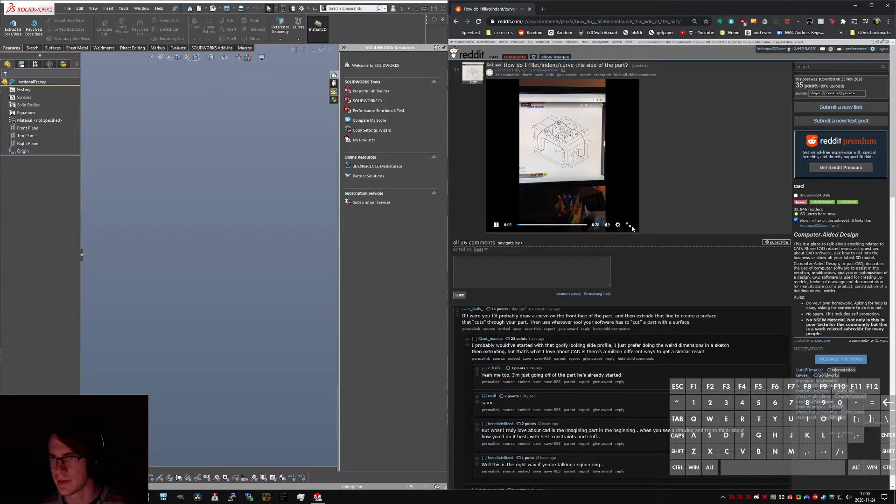Okay, so for the benefit of the people watching, this is the part we're dealing with. We got kind of a funny lump thing. I'll pause it for a sec. This guy's issue is that he can't figure out how fillets work. So he then goes over to show this guy, which is where he's gotten to, which is pretty good. I mean, it's got sort of the bulk of the geometry there, but he's missing those two fillets.

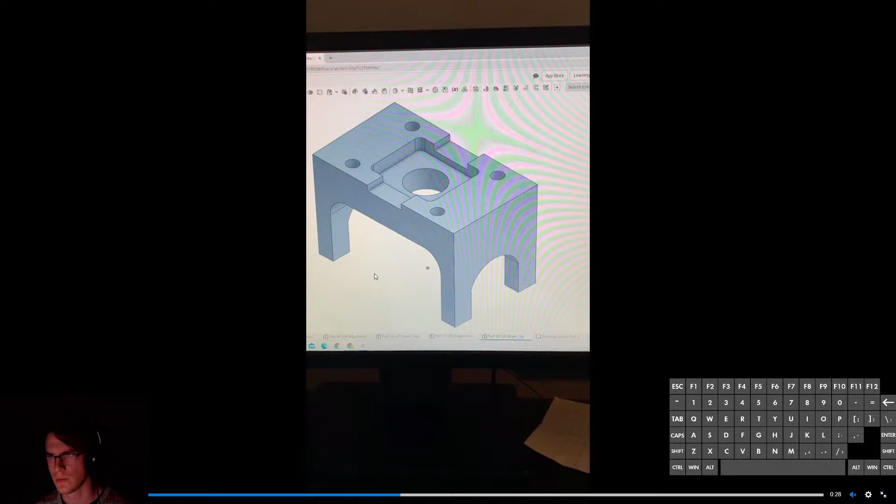So I'm going to model it the way that he did first, and then I'm going to tackle it. Well, I'll model it the way he did, and then I think I can go back and tweak the part and show how to make that without the problem that he's run into, because I think this is a pretty easy thing to fix. So I'm just gonna go hide that. I'm gonna bring up a print on a different screen, and we're gonna hop to it.

So first up, I'm gonna do... Actually, do I want to throw the print up? Yeah, let me throw the print up. Browser, source visible, local file. Hey, check it out. Good streamer, man. Cool, okay, so you can see what I can see, and I can see what I need to see.

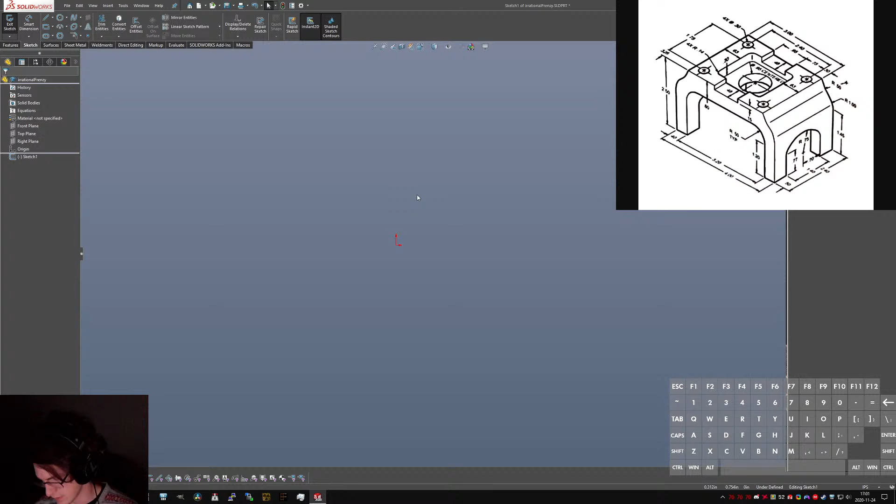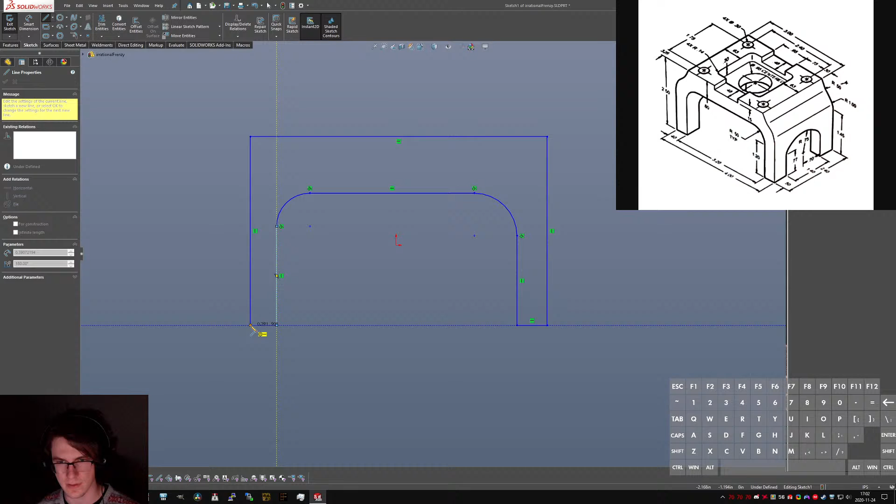So let's start with, well, I'll just leave it on the drawing. So I'm gonna draw it the way that he drew it, which is this sort of roundabout. Oh my god, more fillets. Yeah, I'm adding the fillets. Doing them in the sketch this time though, because I'm a cool kid. Not that you should add fillets in the sketches every time. There are sometimes those sketches that depend on other things where you need to avoid doing it in the sketch.

So I think this one is 0.4. This is 4 inches, and that got it all jacked up. And equal and collinear to make a nice floor. Those are equal. Keep it 0.5. And this, for some reason, is dimensioned from right here. I don't know who would ever dimension this way, but it's bad and dumb, and you shouldn't do that. Agree to disagree, more fillets. Look, I'll put more fillets on it at the end.

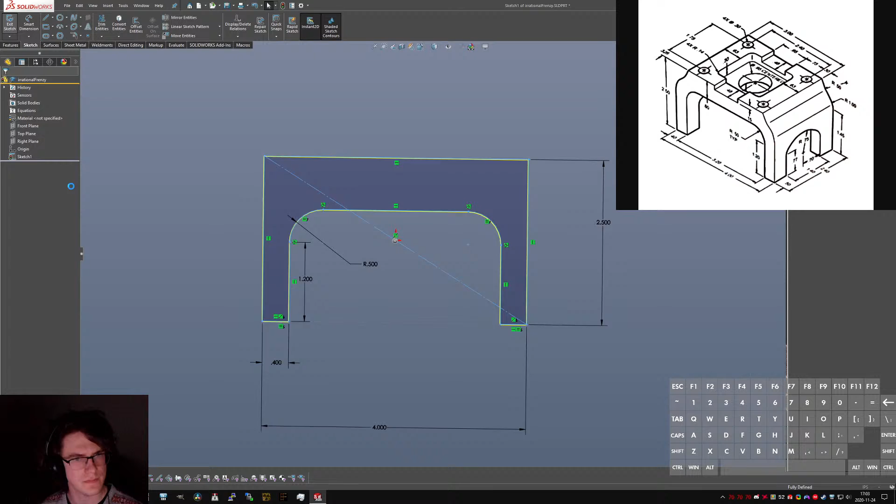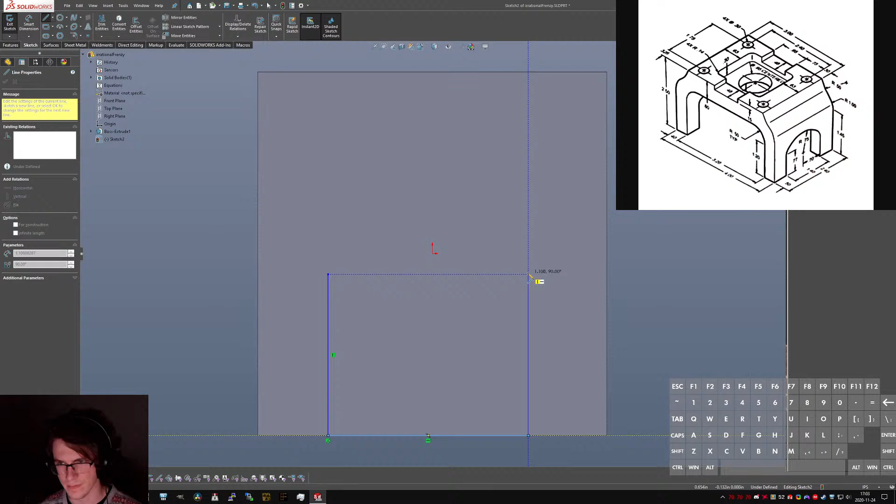2.5 inches tall. That's that set of features. Do a midplane because I'm a cool kid. That looks like 2.4 inches. It's not really perfect, but it's close enough. Oh, this will be a little annoying. So whoever drew this decided that this needed to be kind of its own weird thing. And it's just doing it. It's just really going for it.

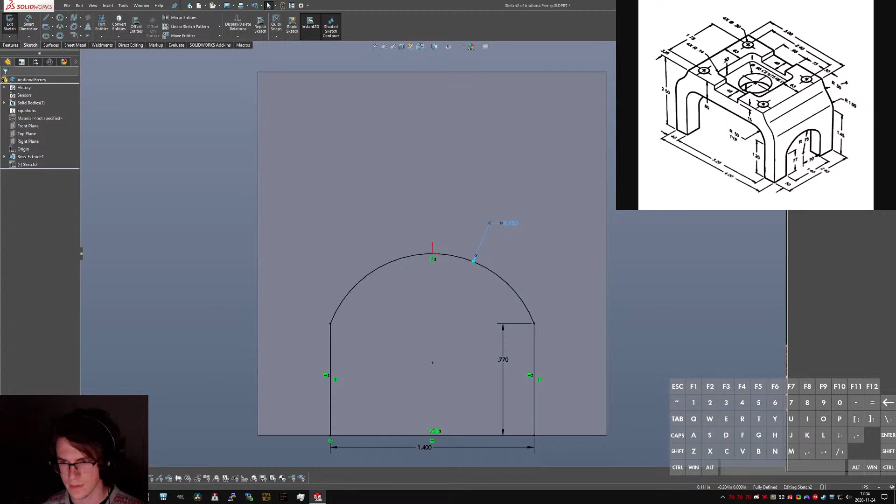This is 1.4. And I'm going to be a git. I want to select the midpoint and make it vertical, so it's easier that way. And those aren't equal, but they are now. Nice. So this will just be an extruded cut through all to make those sort of arches on the sides. Then we're going to come up here and probably go with this big guy here in the center first.

Oh god, I can't tell how wide that is. I photoshopped this. I tried to. This is 2020-2021, I think, the educational version. Actually, hang on. No, I can just boink. Yep, 2020-2021. Via the ever gracious... Oh my god, I cannot figure out what number that is.

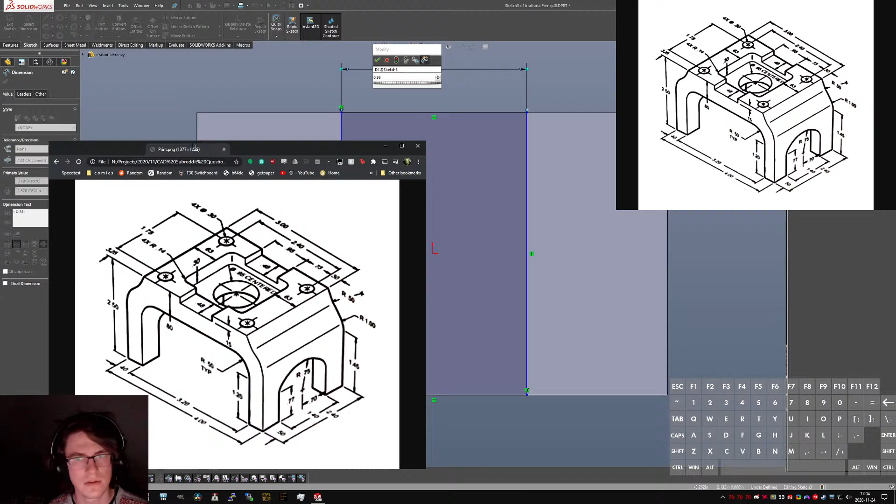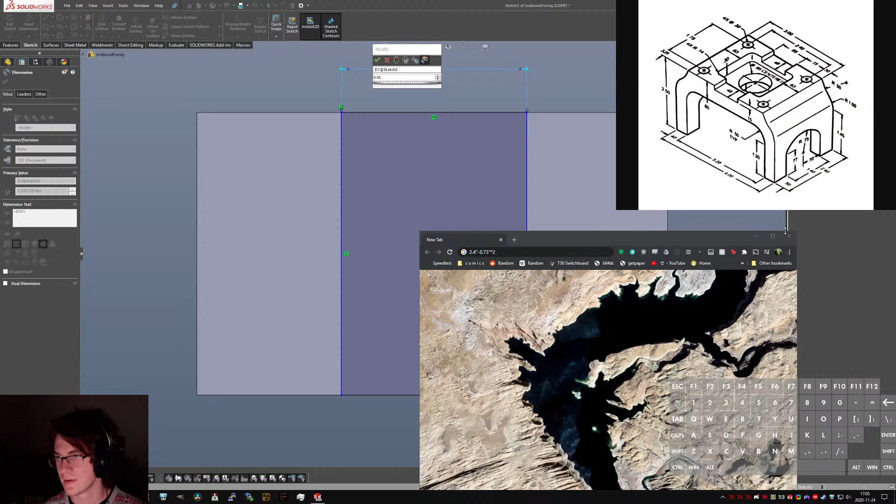Okay, so to give you some context: drawing, math. This number right here looks like 2.4 inches minus what looks like 0.73 inches times 2 is 0.94, 0.95. I'm just going to go with 0.95. Whoops, I need that tab back because that's the one I'm using. Oh, yeah, I also have dark mode on because all the cool kids use dark mode.

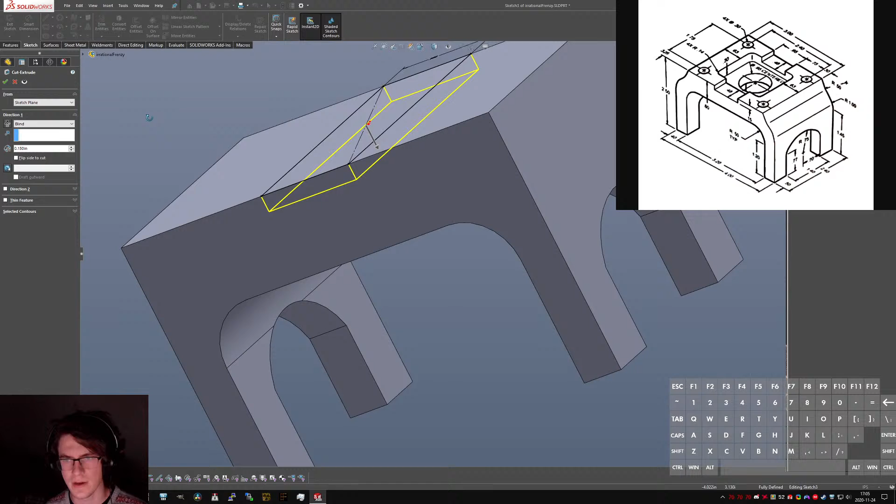And point. Okay. The depth there is 0.15. And we're going to do another extruded cut. Actually, I want to do the extruded cut for the middle bit before the other bit because, I don't know, I had a reason for it when I started that sentence, and then I didn't by the end.

Boink, boink, boink, boink. Whoops, shit, I hit escape instead of enter. The other thing you can do is right click, that's why you get that little green check mark there if you don't move your mouse too much. And those radii are 0.14. And then we've got some dimensions.

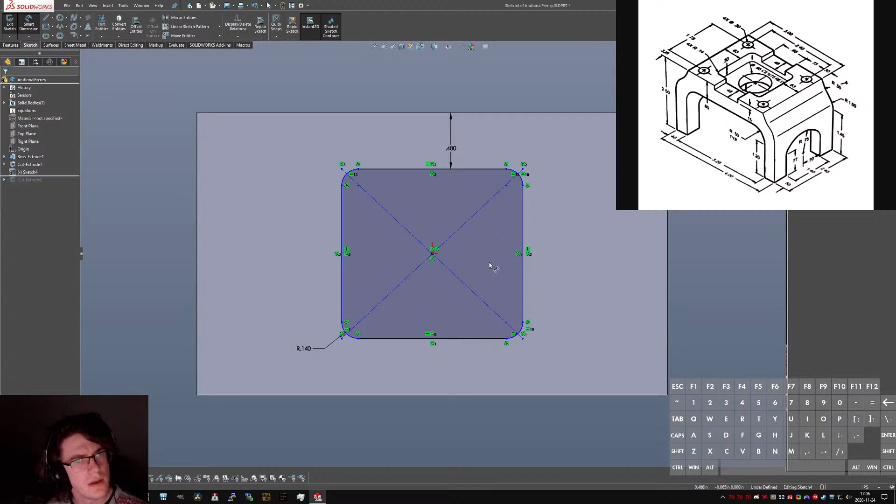Bollocks, they don't describe how high that is. Oh, no, wait, they do. Yeah, okay. So, for whatever fucking reason, they've decided to dimension this as distance here at 0.48. And that'll be, because it's still merged there, it's still controlled. And then they've got, oh, that's right, here's the screwy part.

So, the way this guy modeled this, doing this feature before he did the cutouts over here, these kind of swoopy cutouts, it's impossible to define this identically with the drawing, so instead I'm going to have to go, okay, this is 3 inches, these are 0.63 inches. It's probably 0.625 because rounding 1/8 of inches, and because for some reason this is all in only 2 significant figures, but 3 inches minus 0.625 inches times 2, 1.75 inches.

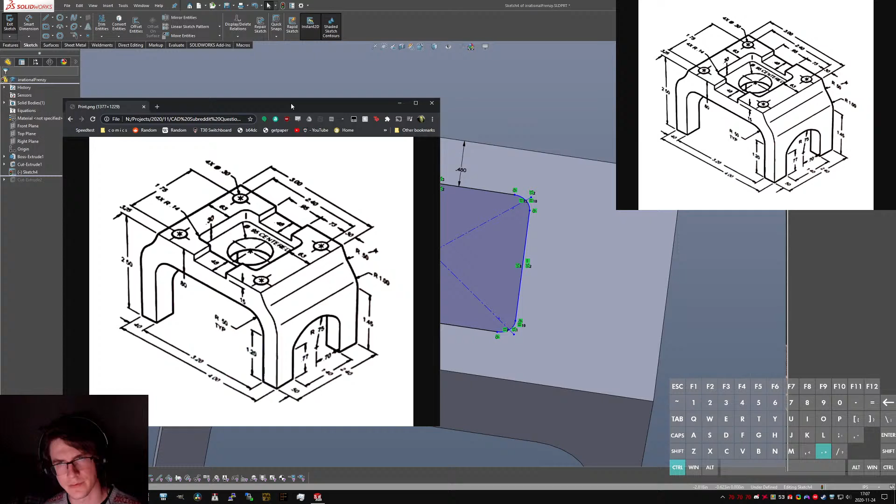That seems pretty reasonable. There's not another dimension on there, so it's not over-constrained, but I'm just going to go with, whoops, keep disappearing my drawings. I'm just going to go with like 1.75. That's nice and reasonable. And then, also according to the drawing, this is 0.3 inches down. And then we have both of those features.

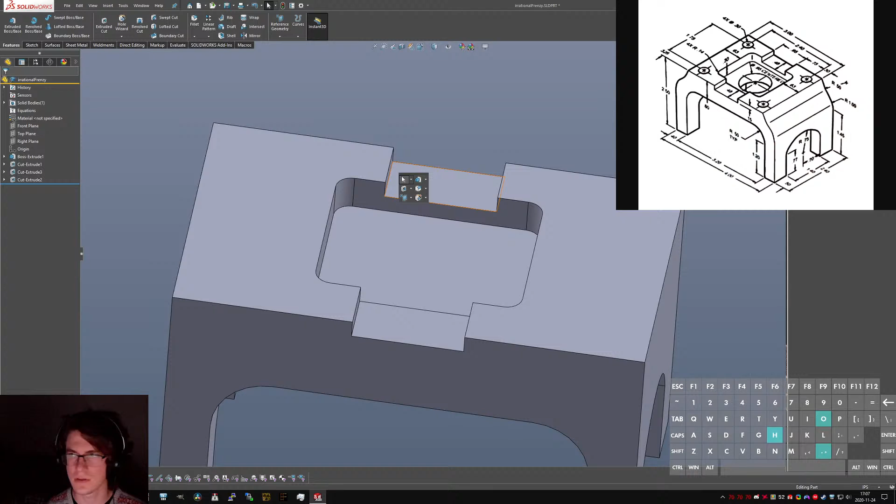Do a quick hole wizard. Yep, God, I need to fix that. It's so annoying. This is not metric. These are 0.3 inches roughly. I don't know. I'm just gonna reset the sizing values. That's ANSI inch. Drill sizes. Oh, come on.

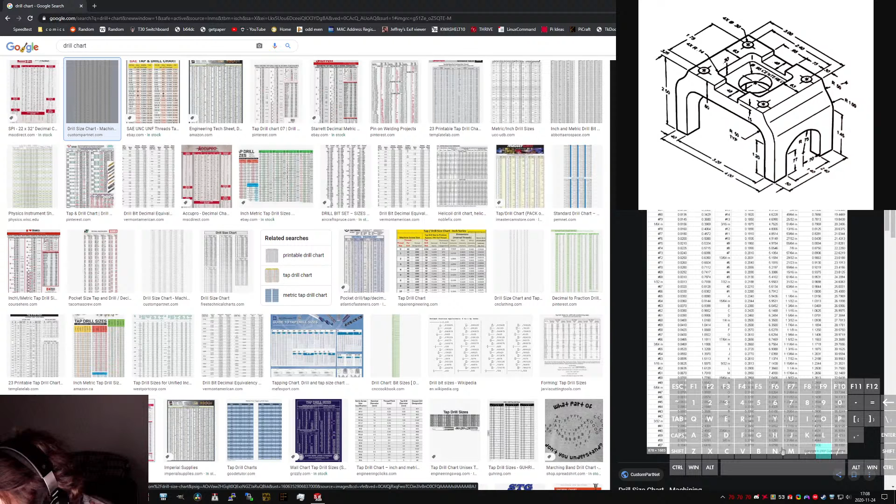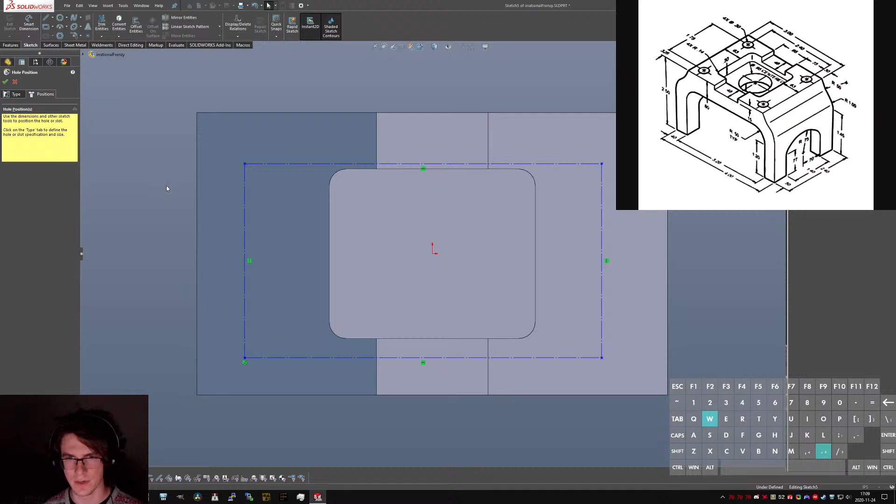And a quick rectangle to give me all my points. Poink, poink, poink, poink. Whoops, that one's not on the corner. There we go. No. Fuck, come on. There we go. Okay. I'm going to make that construction. That's really more of a personal choice thing. I like to have all of my geometry that's not making structures be, I'd like it to be words, but it can't be words because I can't remember what words are.

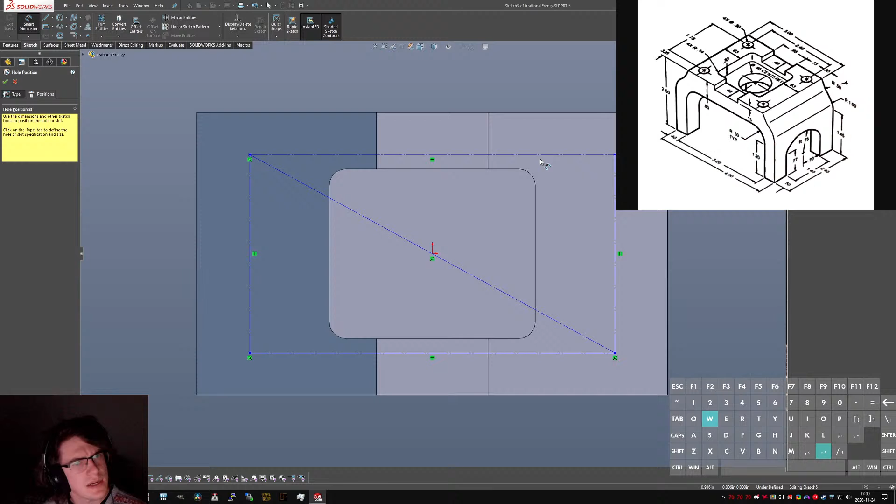Okay, so it's 3 inches on the outside and 0.3 inwards, so this is going to be, oh, 2.4. That already says. I just can't read. Then it's 1.75. And I don't remember if I set those to be up to next. It's not really necessary. Yeah, but up to next is a lot safer.

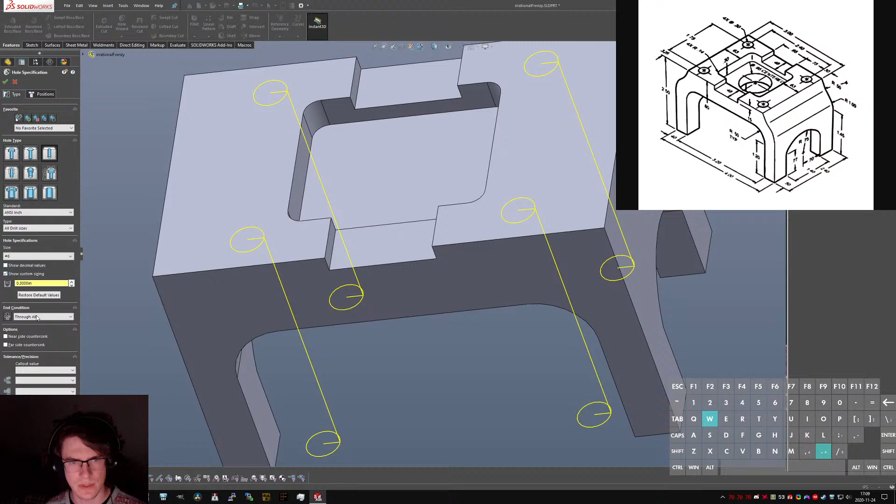Okay, so what our hero did is... Oh, wait, I'm still missing a hole. I'm just going to do it with an extruded cut, because I'm lazy. Boop. Faster for this sort of thing, too. 0.95? I can't really tell. Looks about right scale-wise in the drawing, so it's going to be 0.95.

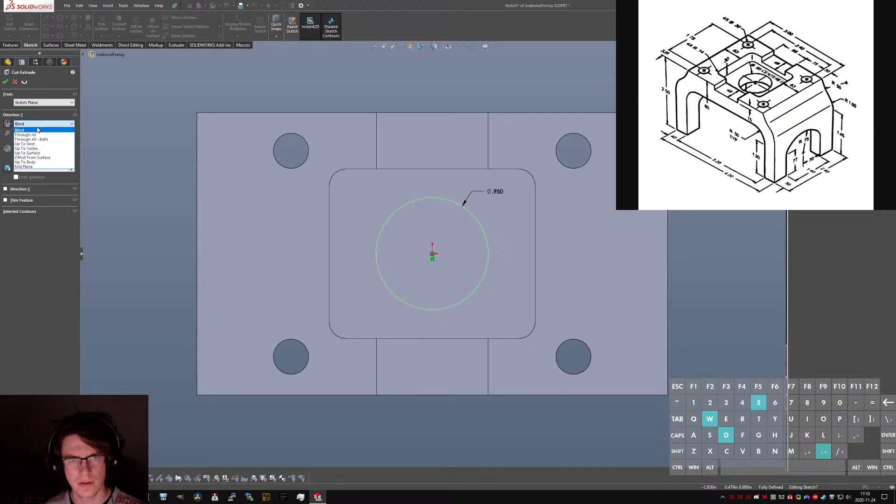Up to next. I'm more okay with using big extrude cuts rather than hole wizards for big single holes like this, because it's the sort of thing where you want it to be just exactly this size, and you don't want to use custom sizing in the hole feature. I mean, sometimes it matters if you want to have your hole callouts be exactly right, or if your company has drafting standards for those hole callouts, but generally speaking, I'm kind of okay with doing this sort of single op extrude cut.

For a little while, when my hole wizard wasn't working, I got used to sketching out points of patterns and then making a plane with a line and a point in that pattern and using that to make a revolve and a cut to shape the bottom of my holes. That is garbage. You should never do that. But it was the only way I could make properly shaped holes, which was really dicey. Fun side effects of having multiple SolidWorks installs.

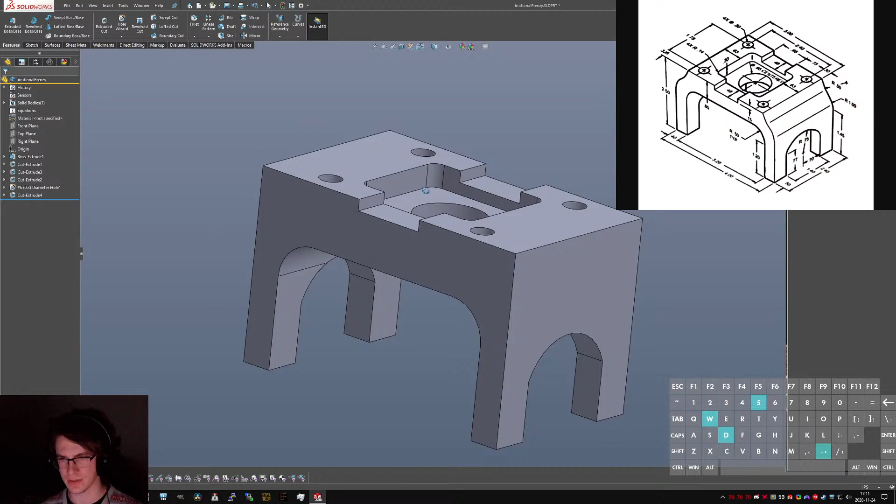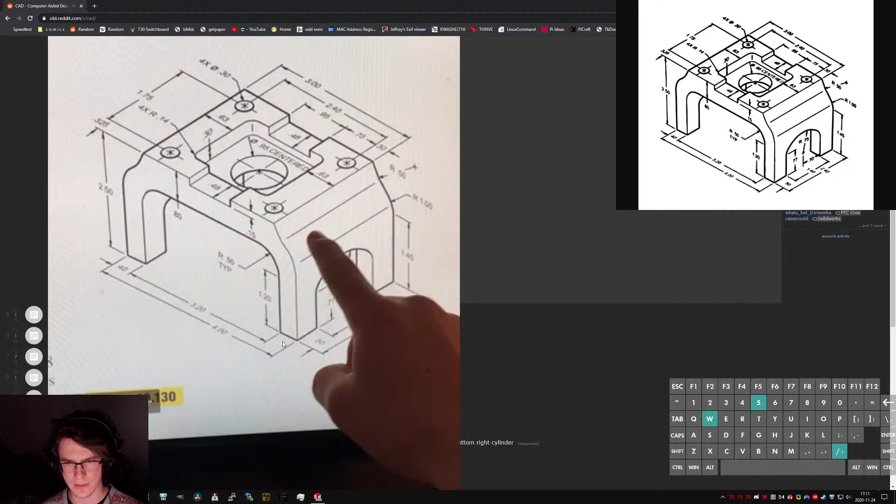Okay, so this is how far our hero got in the original video, which I'm going to go pull up here. r/CAD. Boink. Okay, so this guy, he got this far. He got all... Actually, hang on. Skip ahead a little. Okay. What? No? You can give me back my part. Here we go. Okay, so we got hole holes.

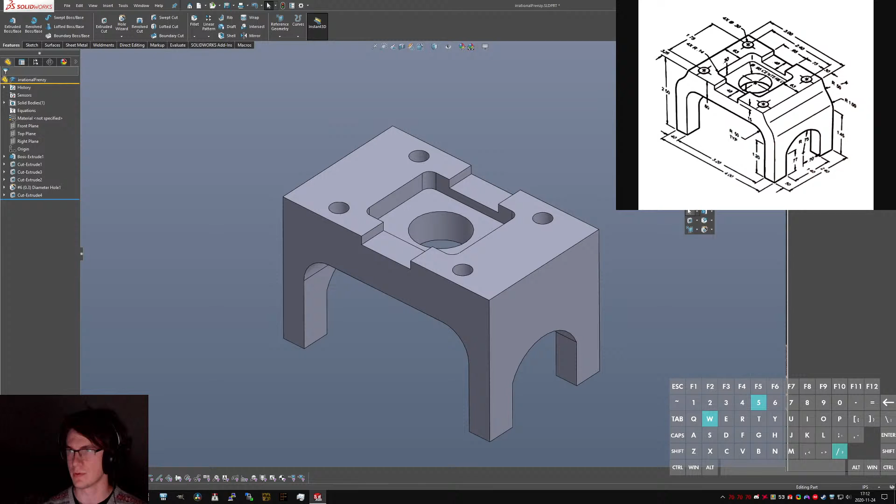Yeah, that looks pretty close. Yeah, close enough. So the way I would go about doing this now is I would probably start with an extruded cut. Like if I, for some reason, ended up at this model, if I didn't want to change anything else, or if I had other features that would be breaking, front plane, just because it's good to do sketches from there.

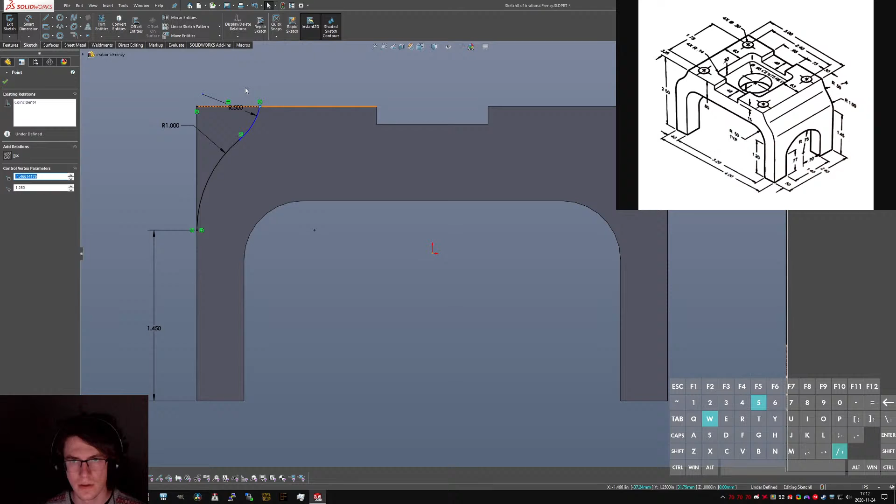We're going to come down, and we're going to make our two arcs. I'm assuming they're tangent because they're not marked as otherwise, but if that's not something that's safe to assume, don't assume that for sure. But 0.5, 1 inch, and based on the drawing, we know this is 1.45. Cool, okay, so that gives us half of it, but it's a symmetrical feature, so we come down here and do a little bit of this.

If you wanted to do it quickly, rather than showing you that, you can make a construction line in the middle where you want your stuff to be mirrored across. Whoops. Okay, here we go. Mirror entities, entities to mirror all of these ones, mirror about this line, boink, and then you're set.

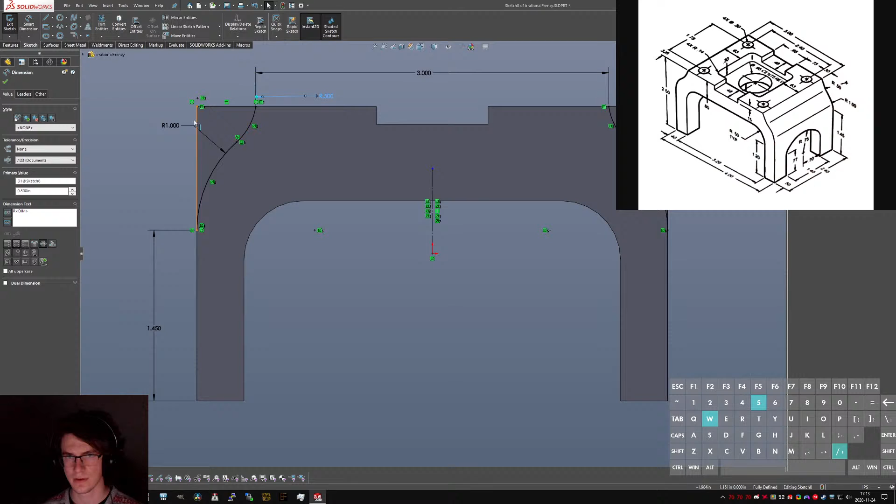Now, the feature for this is we know that's 3 inches across, and we have to have both sides in order for that to work. I'm gonna put that kind of there-ish, just because I like having my dimensions in the same locations. That's how I would do this if I couldn't go back and change the original part geometry, or if I was handed a step file, but I don't like to do cut features like that later. I like to have as much of my geometry defined as early in sketches as possible.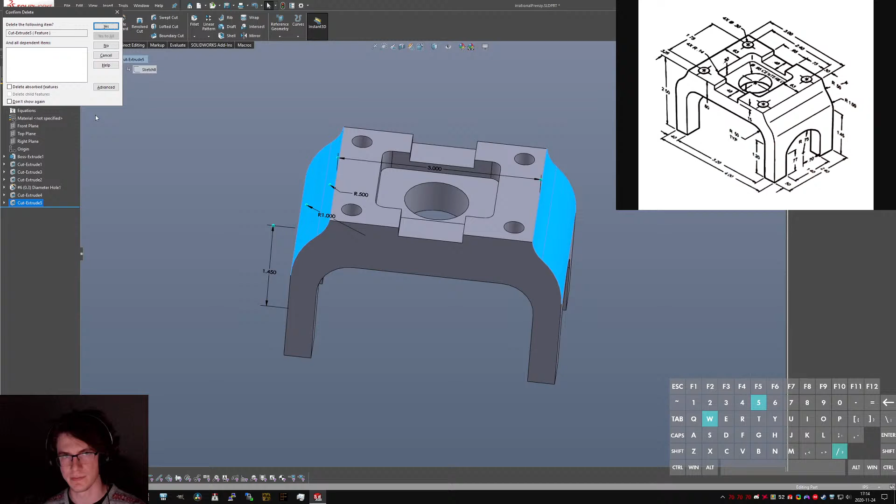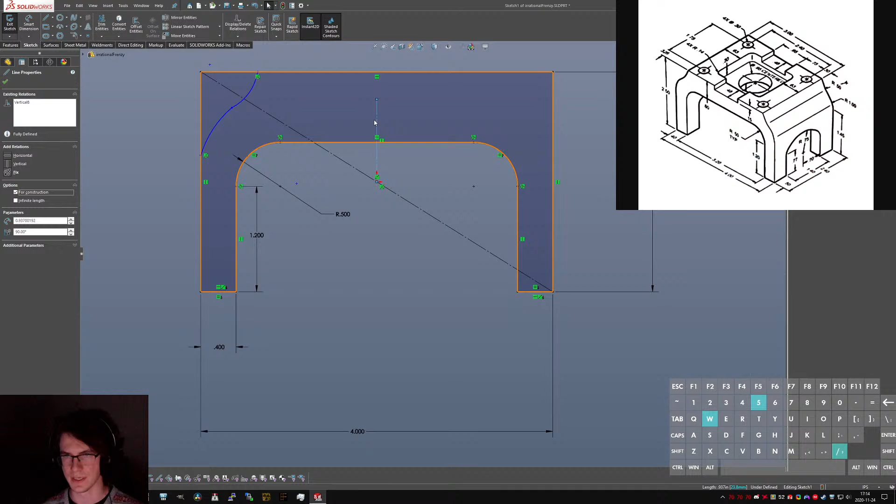So instead what I'm going to do is I'll get rid of that, I'll get rid of its sketch, and then I'll come back here to the first sketch in the first feature. I guess I have to use funky arcs here, but do this as early as you can, and I think I'm gonna use the mirror feature here too, just because there's no reason not to. I like centering them on the origin because that gives you a nice reference for making sure it's centered. So 0.5, 1, and tangent, and tangent. We're gonna trim these guys.

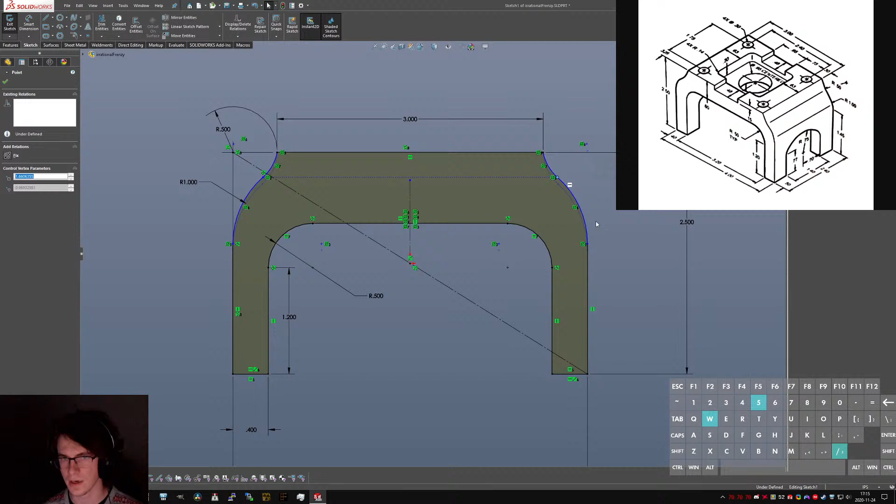And I just realized I didn't give that a nice point to reference to. So what I can do is I can make a point that these two coincide with, and then merge that, and then it just solves itself. So then we'll do a quick mirror entities for these two guys. Mirror about this one. Trim those off, and that gets rid of my height dimension, but you can just add that right back. And then 3 inches. And why isn't it constrained? Oh, right, I forgot one dimension down here. This is 1.45.

But that's how I would do that, I would go back to the start and I would make that feature in as early as I could. I don't think I really have anything else to show for this, but it's important to think about profiles really early on so that you're limiting how many extra features you have to add. It's kind of a challenge on the SolidWorks forums, what's the minimum number of features you can use for a part. So think, okay, what are my most detailed profiles, and start with those so you can get as much out of the way as soon as you can, and it helps you model faster too.

So Model Mania, competitions with Too Tall Toby, and I mean, you shouldn't really be modeling things as fast as you can. You should be modeling them safely, but when you have practices that help you model quickly, they also help you fix problems quickly. So if you break something earlier in your tree, or there's something that you missed and you need to change that dimension, it's really good to know tips on how to go back and say, okay, I want this feature earlier, as early as I could get it, so long as it doesn't break other things. Again, that's a little bit design intent, but it's worth thinking about.

So I think I've been streaming now for all of... how long does it say I've been streaming for? 20 minutes? Really? Doesn't feel like that long. Oh no, only 20 minutes or so.